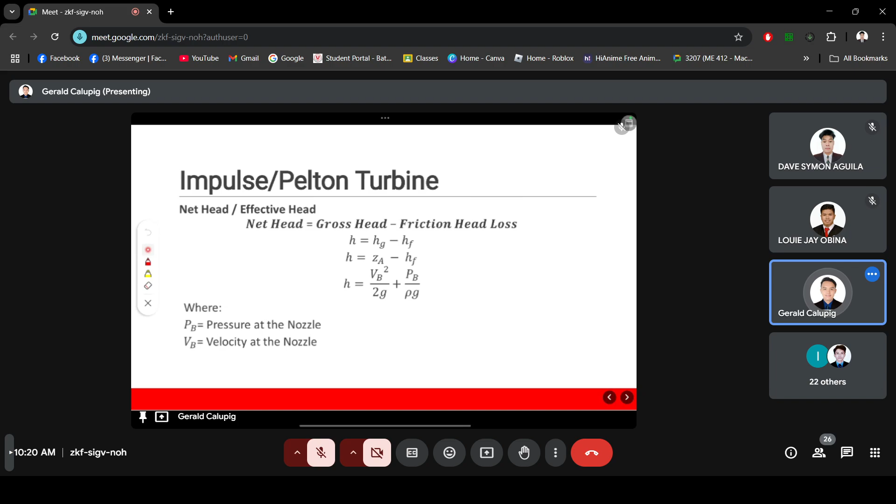Here, yung PB lagi natin is based on the Bernoulli equation. It is the pressure head and the velocity.

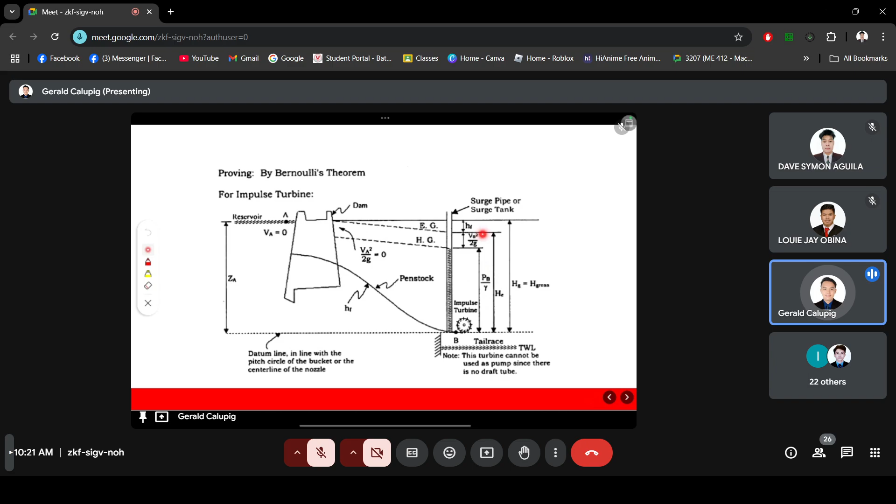So next we have here the frictional head loss. Frictional head loss HF is equal to FLV squared over 2 times G times the diameter. If it is Darcy, Darcy kapag nasa denominator ang 2.

HF, pag Morse equation naman, we can have HF is equal to 2 times FLV squared over GD, or acceleration due to gravity times the diameter. Pag Morse, ang 2 is nasa numerator. Pakitandaan ha, pag sinabing Darcy equation, ang 2 is nasa denominator. Kapag Morse naman, nasa numerator ang 2.

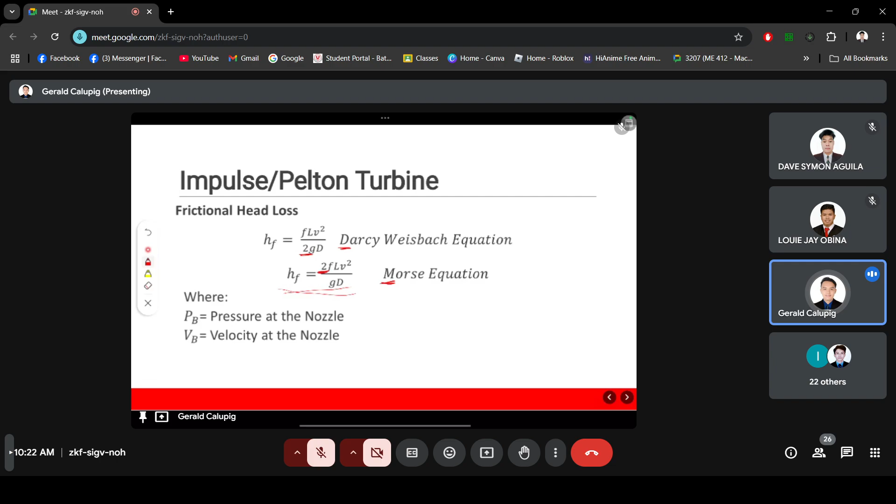Please take note of this formula. Any question po with this equation or formula? If none, we can proceed to the next.

But before that, please be reminded that the turbine casing here in the impulse turbine, ano yung ano natin before, hindi siya pressurized. So the runner operates in open air. Only the kinetic energy is being used, and this is ideal for high heads and low flow application. That is for the impulse turbine. Okay, before we go to the reaction turbine, this is just a review of our discussion last time.

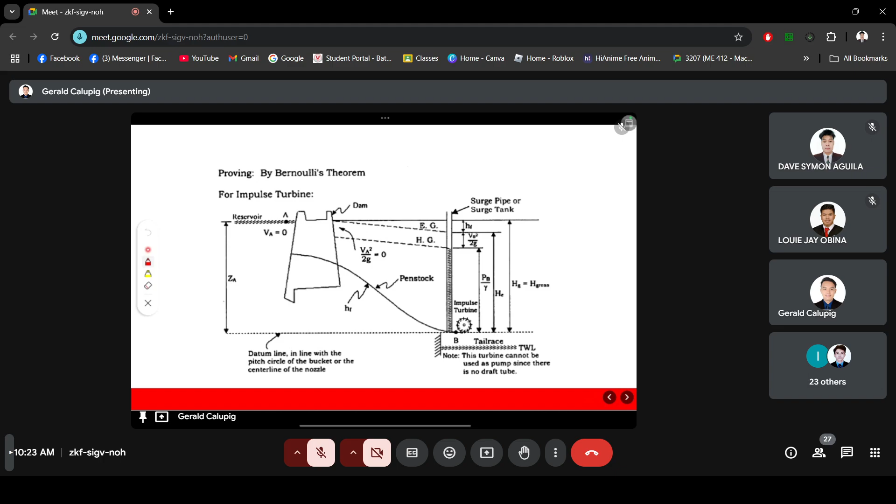Okay, next we will go to the reaction turbine. Reaction turbines, like Francis and Kaplan turbines, operate on a combination of pressure and kinetic energy. Unlike the impulse turbine, water flows around and through the runner. So the energy is extracted from both pressure changes and velocity. The turbine is fully submerged in water and operates under pressure.

So this is the diagram for a reaction turbine. In a reaction turbine, head isn't fully converted before the water enters the turbine. Instead, energy is extracted throughout the turbine as pressure decreases and the water flows over the blades.

So we have the components of the head. We have the pressure head, which is dependent on the pressure difference. Next is the velocity head, due to the motion of water, and the elevation head, due to the height of water. This is the same principle as with the impulse turbine, just that we have here ZB, which is from the turbine to the tail race.

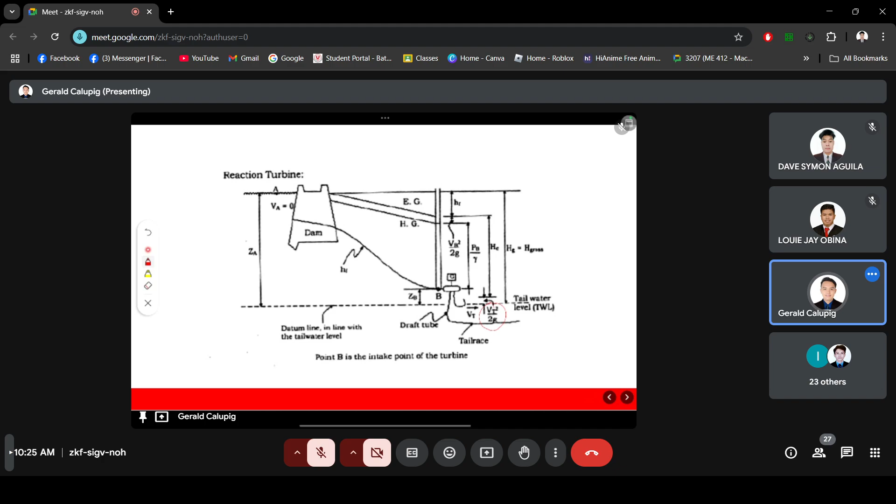So using Bernoulli's equation, we can have H is equal to ZB plus VB squared minus VT squared over 2G plus PB over the specific weight, which is density times the acceleration due to gravity, G.

Where PB is the pressure at the nozzle and VB is the velocity at the nozzle, and VT is the tail water velocity. But in terms of head, we can have H is equal to Hg minus Hf minus Vt squared over 2g. So we're subtracting the head in the tail water, or in the draft tube.

Any question for the reaction turbine? For the losses, same losses with the friction loss. For Darcy, we have FLV squared over 2dg or 2GD. And for Morse, we have 2FLV squared over GD. Same, don't get confused with the friction head loss. Remember, for Darcy, it is in the denominator. For Morse, the multiplier 2 is in the numerator, okay?

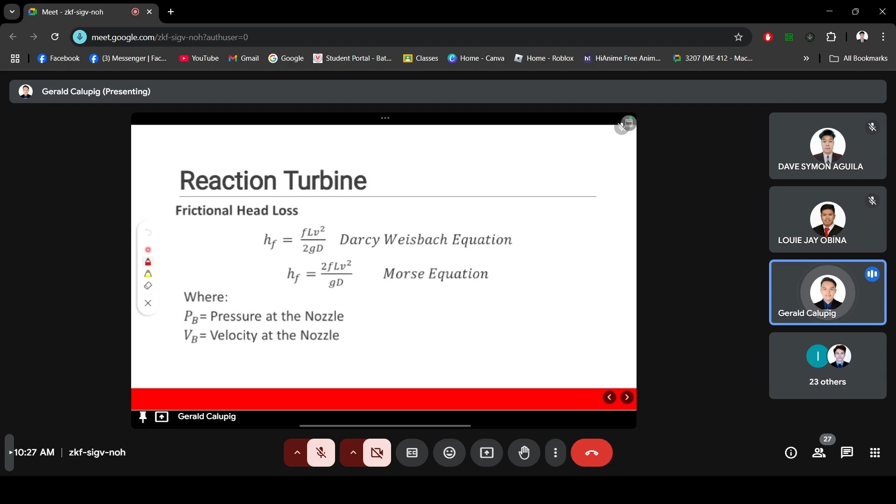Any question? None? So we can proceed to the next slide. We have the velocity of water jet at inlet. V is equal to CV times square root of 2GH. If we don't have the coefficient of velocity, we can neglect that. If it is given in the problem, we can include that. Remember, if there's no CV in the problem, exclude CV in the formula or treat it as one. If it is included or stated in the problem, please include CV, which is V equals CV times square root of 2GH, where H is the net head.

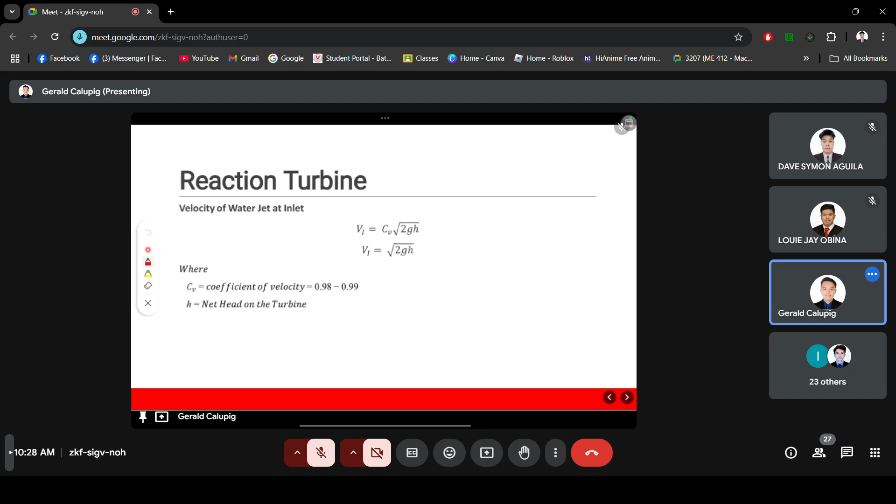Next, the penstock efficiency. We have penstock efficiency equal to H over Hg, where H is the net head of the turbine and Hg is the gross head. Same with the fluid or water power, or the hydraulic power, we have Fp equal to specific weight times Q times H, where Q is the volume flow rate. It is the same principle as with the pumps, fluid power equals specific weight times Q times H.

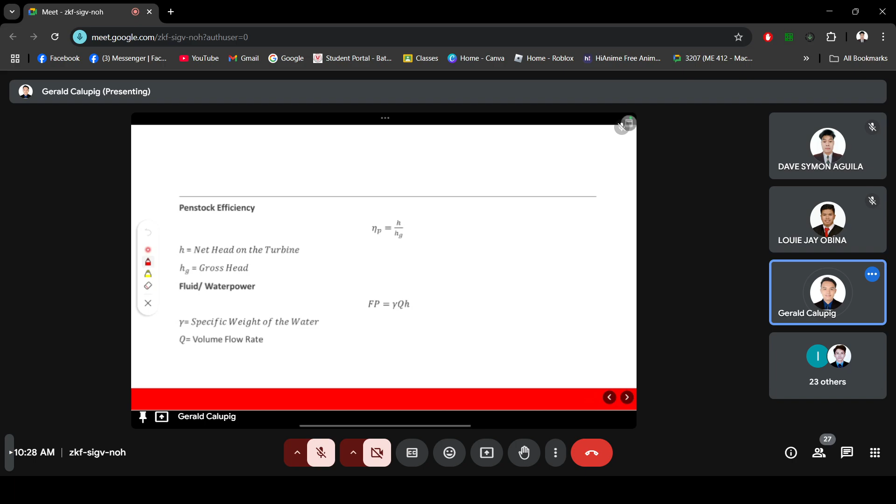We also have the peripheral coefficient, or speed ratio. Speed ratio is the ratio of peripheral velocity to the velocity of the jet, which equals pi dn over square root of 2gh. If we have a given CV, kindly include it. If not, don't include it.

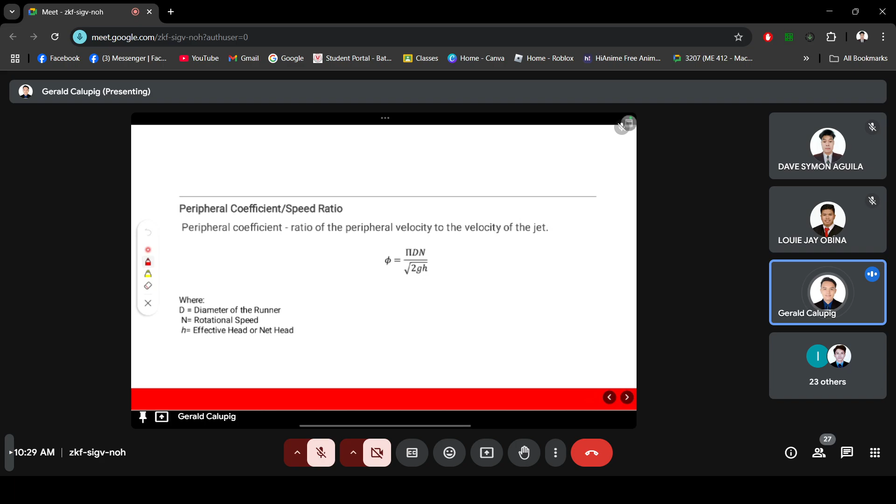So for the generator speed, we have generator speed N is equal to 120 times F over P, where F is frequency. Here in the Philippines, we use F is 60 hertz. And for P, that is the number of poles.

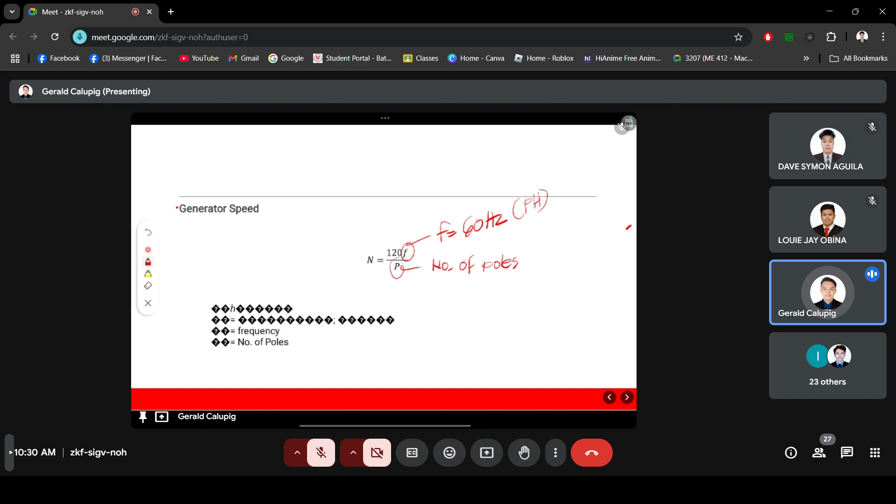Okay, any question for the formulas? Let's proceed to the next. We have the turbine efficiency. NT is equal to brake power over fluid power. For the output, or the turbine output, we have WT equal to specific weight times Q times H times NT, where H is the net head, Q is the volume flow rate, and NT is the turbine efficiency.

Next, generator efficiency. NG equals generator output over brake power. It's much better if you can plot this to our lecture from last week, that flow diagram of turbine operations. We had last week the flow from the reservoir up to the tail race, up to the generator, the last rectangle in the flow diagram. From that, make a formula for each gap. For example, you have the generator and the turbine, what's in between them? This is so you don't get confused during examination.

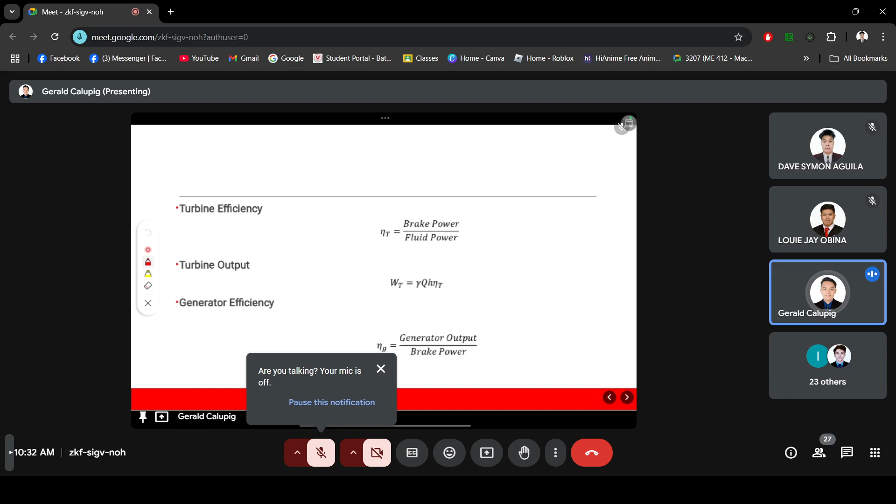Next is the specific speed. NS is equal to N times square root of power in terms of HP, over H raised to 5 over 4. This is for the English system. For the metric system, where power is in kilowatts, you can use the formula: specific speed is equal to 0.2623 times N times square root of power in kilowatts, over H raised to 5 over 4. Please take note of this formula.

Any questions before we proceed to the sample problems? Any questions? If none, we can proceed to the next.

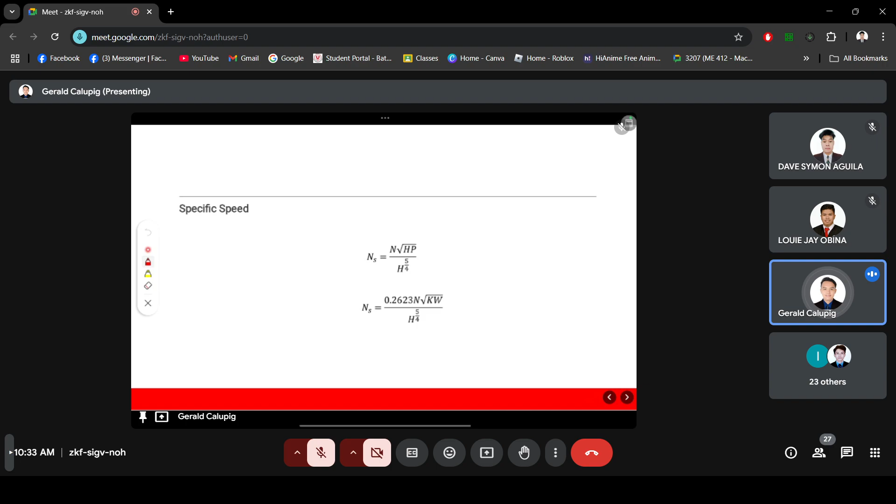So we have here the ranges for each turbine. In identifying the possible turbine, you are asked to find the NS first. Once you already have the NS, you can identify what turbine should be used. If your range is 16 to 30, you can have the Pelton wheel with one nozzle. If it is 30 to 70, it is a Pelton wheel with two or more nozzles. 70 to 400 is under the Francis turbine, which is divided into four ranges.

So we can have 70 to 120 for the slow speed runner, 120 to 200 for the normal speed runner, 200 to 350 for the high speed runner, and 350 to 400 for the special high speed runner. Next range is 400 to 800, that is for the propeller turbine with non-adjustable vanes. And if it is Kaplan turbine, you have a range of 800 to 1000. That's specific speed.

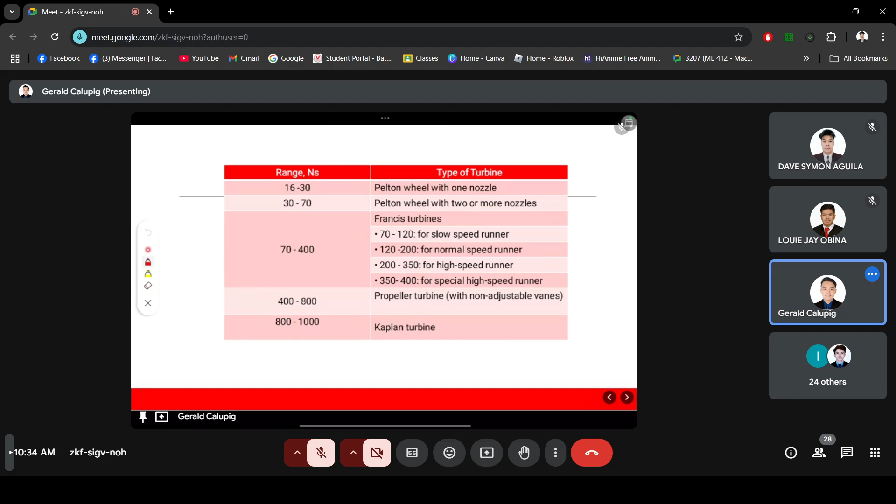Any questions with the ranges? Next, we have here the table or the graph in terms of head, power, and N over NS.

Any more questions? If none, we can proceed to the next sample problem.

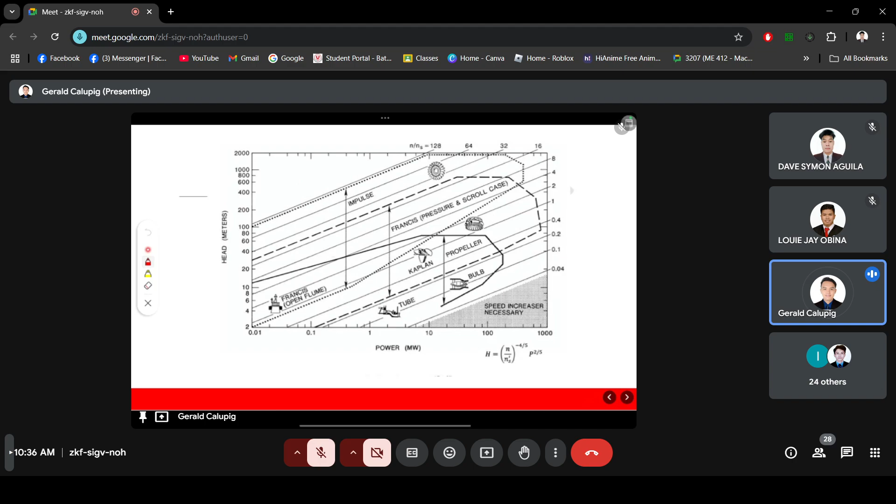So we have here sample problem number one under turbine. We have a Pelton turbine type with a 30-meter head below the head gate of the penstock. The head loss due to friction is 15%, and the coefficient of friction head loss from the Morse formula is 0.00093, and the penstock length is 80 meters. What is the penstock diameter, and determine the power input in kilowatts? You can solve this using our formula.

They will give you the answer first so you can check. I have here the answer: the diameter should be 1.6864 meters, and for the fluid power, you get 12.468 megawatts, using the formula of specific weight times Q times H. Just try to solve it using our formula so we can discuss it later.

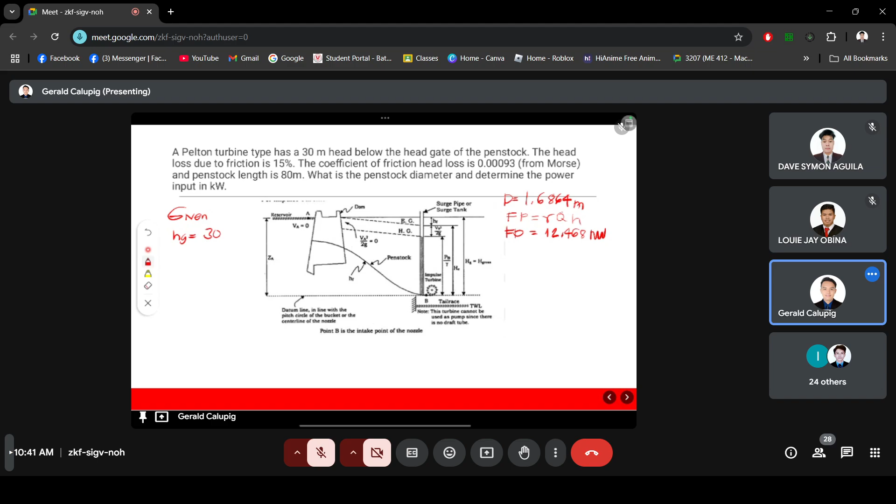So our given: the gross head HG is equal to 30 meters. And we have HF, which is 15%, that is 0.15 times 30 meters. So HF should be equal to 4.5 meters.

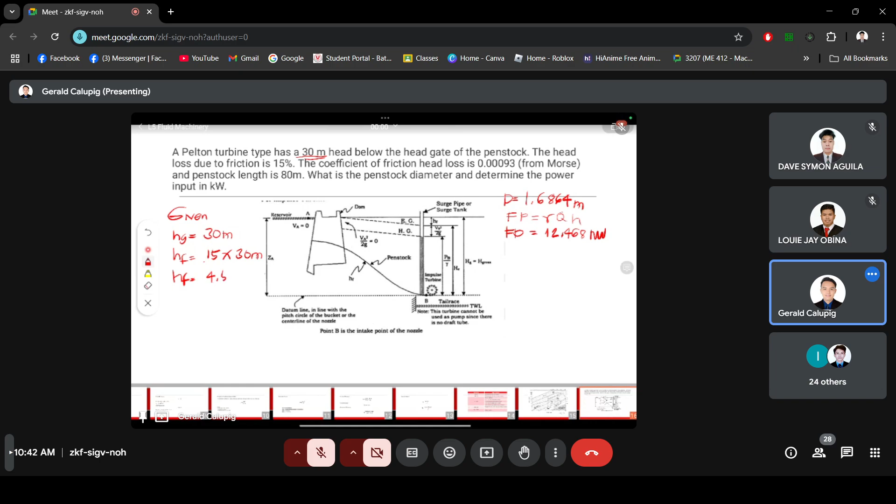Next, we have the coefficient of friction F equal to 0.00093, and the penstock length is 80 meters. We are asked to find the penstock diameter and the input power in kilowatts, which is the fluid power, FP. Let's proceed to the solution.

First, since we have a given, the net head is equal to HG minus HF. So H is equal to 30 meters minus 4.5, which gives your net head as 25.5 meters.

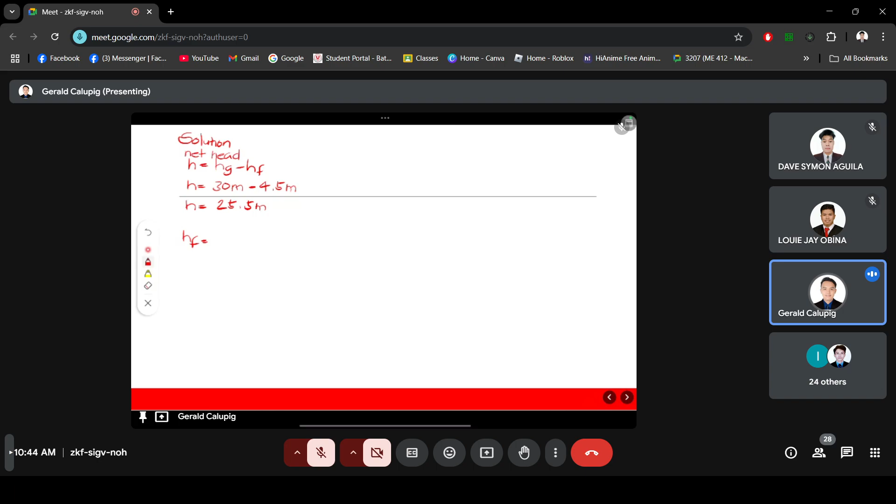So we can have here HF is equal to 2FLV squared over GD. Para makuha natin yung diameter, we already have the HF, the L, the F, but we don't have yet the V.

So for V, we can have the formula of velocity, which is 2 times G times H. Since we don't have the coefficient of velocity, let's neglect that. So we can have here 2 times 9.81 meter per second squared times, what is the value of our H? 25.5 meters, correct? So our V is equal to what?

Please try to compute po so we can write the data value. 22.3676. Okay, thank you. Meter per second.

Okay, since we already have the value of V, we can substitute that to the formula of HF. So we can have HF is equal to 2FLV squared over GD. That is 4.5 meters is equal to 2 times

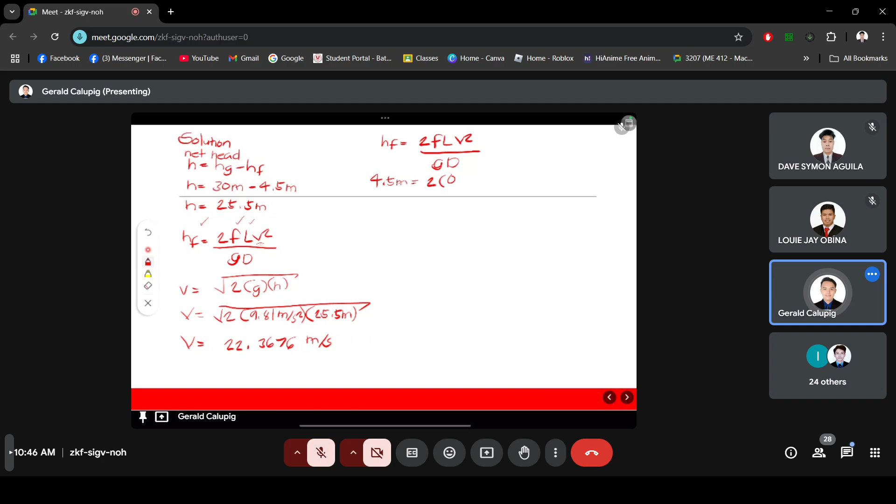0.0 value nun, tingnan natin ha, 0.00093 times L, which is 80 meters, times ang V natin is 22.3676 meter per second over 9.81 meter per second squared times D.

So our D will be what? Ano pong V natin? Nakuha is, based on our answer, we can have that 1.6864 meters. Correct?

Okay, next, since we already have the diameter, tapos na tayo dun sa isa, we can have the fluid power. Our fluid power or hydraulic power, we can have the formula of specific weight times Q times H.

Since we don't have yet the Q, we can solve that, no? Q is equal to cross-sectional area. The cross-sectional area is equal to pi over 4 times D squared times V. Okay? So our Q will be what?

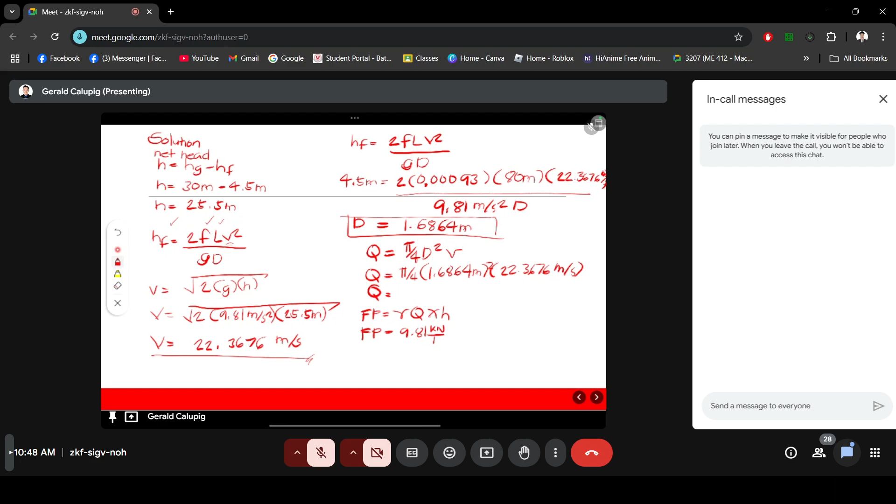So next, we can have our FP is equal to specific weight times Q times H. We can have FP is equal to 9.81 kilonewton per meter cube. Ano po yung Q natin? 49.9609 meter cube per second.

Times 49.9609 meter cube per second times H. Ang H natin is 25.5 meters. We can have our FP is equal to what?

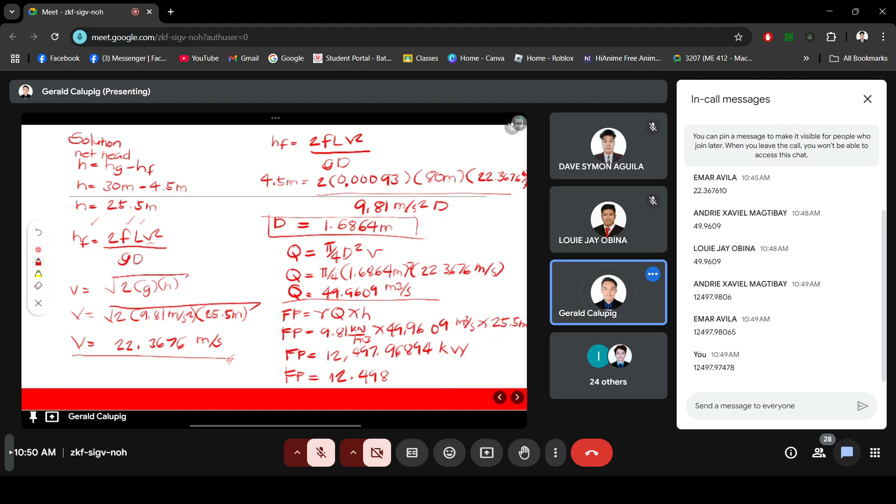49.9609 times 25.5 times 9.81. We can have 12,497.96894 kilowatts. Or we can have our FP, since we have a huge number, we can have that 12.498 megawatts.

So we can have our fluid power is equal to 12.498 megawatts. Any question po? Nakuha po ba ng lahat? Okay, thank you. So, yes po.

Sir, may question po ako dun sa velocity, pero okay lang naman po. Dun po kasi sa formula ng velocity, meron pong CV. Kailan po ginagamit yung may CV, sir?

If it is stated in the problem that we have the coefficient of velocity, we can include it. If it is not included in the problem, we can exclude it.

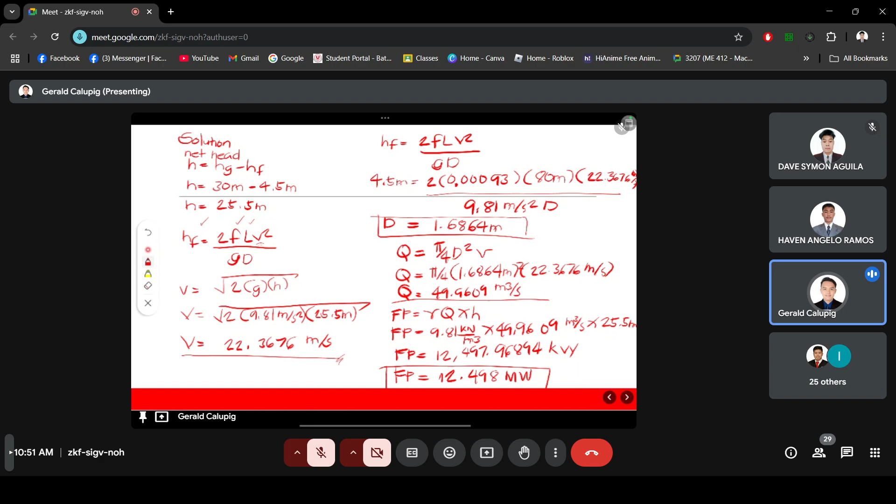Okay po, pero ang gagamitin po dun sir is yung 0.98? No. If it is included sa problem, ang CV, kalimitan ang value niya is 0.98 to 0.99. If hindi siya kasama sa problem, if it is not included, wag niyo nang gamitin yung CV.

Okay? Yan lang naman, thank you. Any clarification pa? Remember, no, kapag walang CV sa problem, wag niyo na i-include sa formula. Okay? If meron, include niyo. Okay?

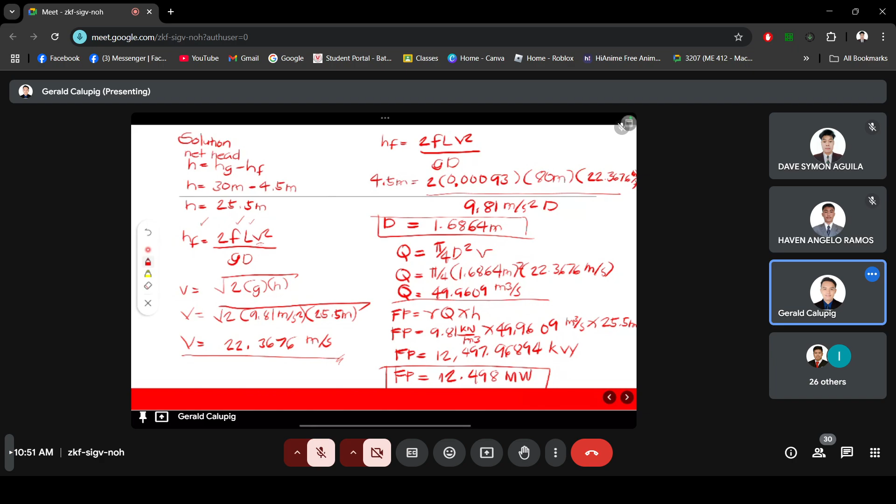Next problem we have here. Problem number two. In a Francis turbine, the pressure gauge leading to the turbine casing reads 380 kilopascal, and the center of the spiral casing is 3 meters above the tail race. If the velocity, yes po, question?

May question po ba? Yung efficiency, may question ba efficiency? Efficiency ng... Last problem. The number one, wala naman tayong tanong na efficiency. Wala tayong tanong na efficiency. Coefficient yun ng friction.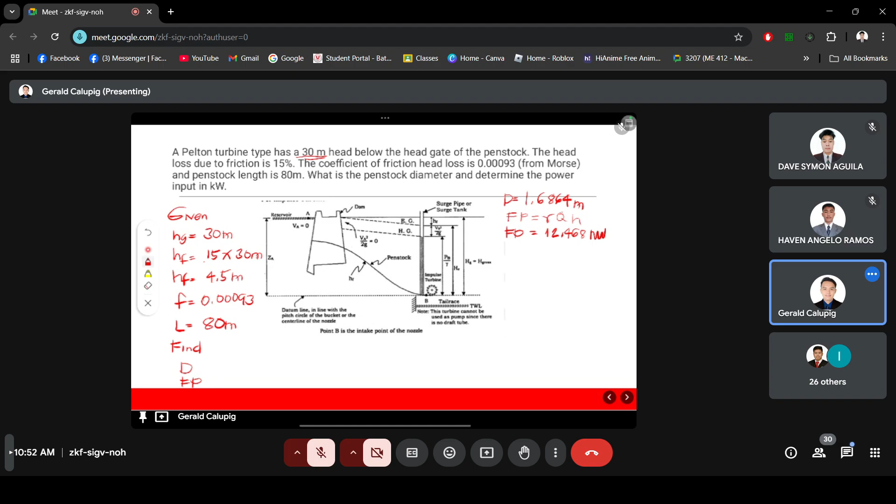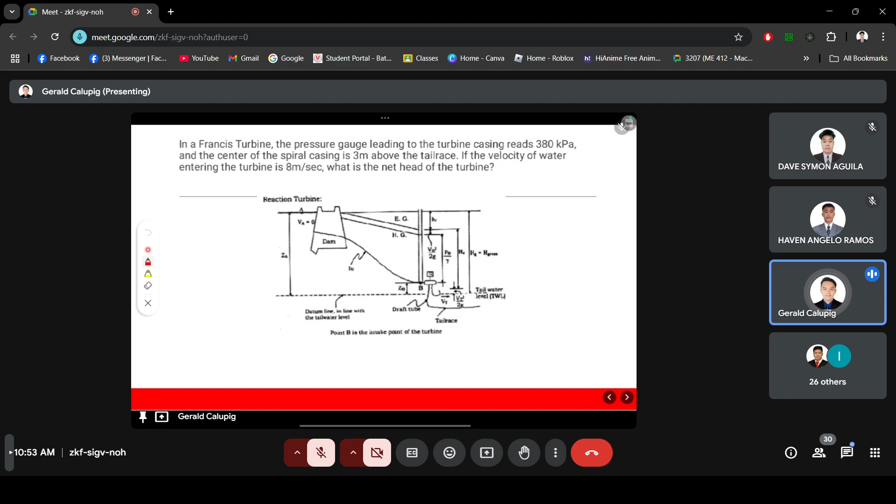Okay, going back, okay sige, sige. So going back, in a Francis turbine, the pressure gauge leading to the turbine casing reads 380 kilopascal, and the center of the spiral casing is 3 meters above the tail race. If the velocity of water entering the turbine is 8 meter per second, what is the net head of the turbine? So here you will going to use the Bernoulli's equation, which is the net head is equal to what?

Pressure head plus velocity head plus the elevation head. Please try to solve po and you can get the value of head is equal to 44.9978 meters. Okay, please do not try to solve but i-substitute nyo na. Direct sub yung problem. Okay? Please try po.

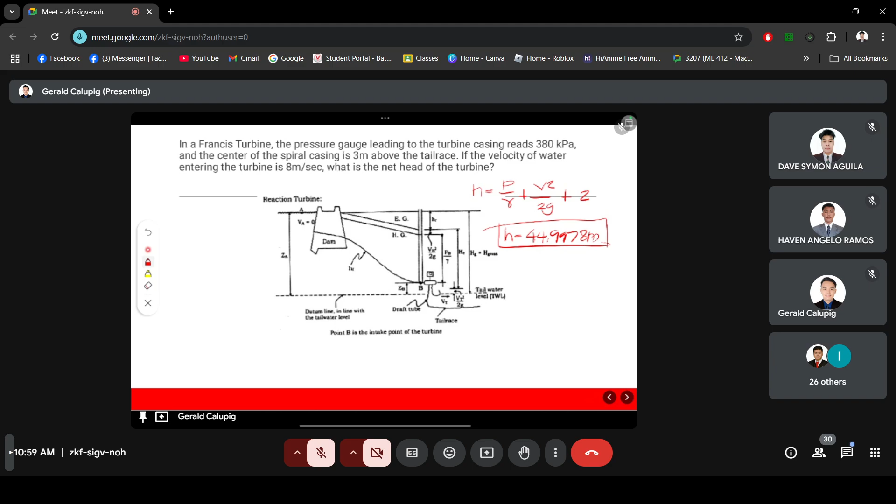Okay na po sir. Okay na. Okay po. Sige. So, ayun po sir, pasensya na po, medyo po magulo po yung sulat ko. Okay. Sige, continue. Bali, sinulat ko po yung given po natin na pressure din po yung ating CB po or yung ano. Then, given po ang ating VT which is, yun nga po, then direct substitution na lang po na sa formula na PB over rho or the specific po, tapos specific density po, tsaka yung gravity, then VB squared minus VT squared over 2G, then plus ZB. Then direct substitution na lang po.

Since meron pong given na yun nga pong pressure po na naka KPA, para po makancel po natin yun at makuha po natin yung final answer po, ginamit ko po siya, ginawa ko po siyang Newton meter squared, which is kung ano po natin yung mga units po niya, pwede pong gamitin na kilogram meter over second squared. Then para po makakancel na po natin yung mga units po para makuha po natin. Hindi ko lang po nasulat yung meter, pero final may meter po yun.

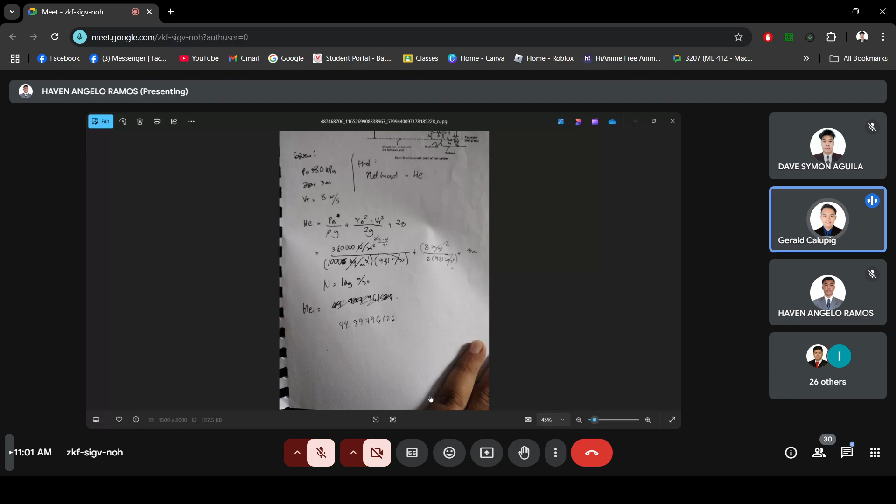Okay, thank you. Pero dun sa ayun sa pressure, you can use naman yung 380 kilonewton per meter squared. Since ang ating specific weight is we can have 9.8 kilonewton per meter cube, para hindi na tayo pwede naman yung sa unit analysis, pero if nagmamadali kayo, or you can have the understanding with the relationship with the pressure, since pressure is force over area, okay naman din yun. Okay, thank you, thank you.

So, any question po before we proceed to the next problem? May question po ba? Okay. Okay, I think we can proceed to the next problem. Thank you, no, thank you.

So we have here a turbine is to operate at 400 RPM under a net head of 1,320 feet. If a single 6 inches diameter water jet is used, find the specific speed of the machine, assuming CV is equal to 0.98 and the specific speed or the speed ratio is equal to 0.45 and NT is 0.85. Find also the required pitch diameter of the wheel. Okay, please try to solve this one.

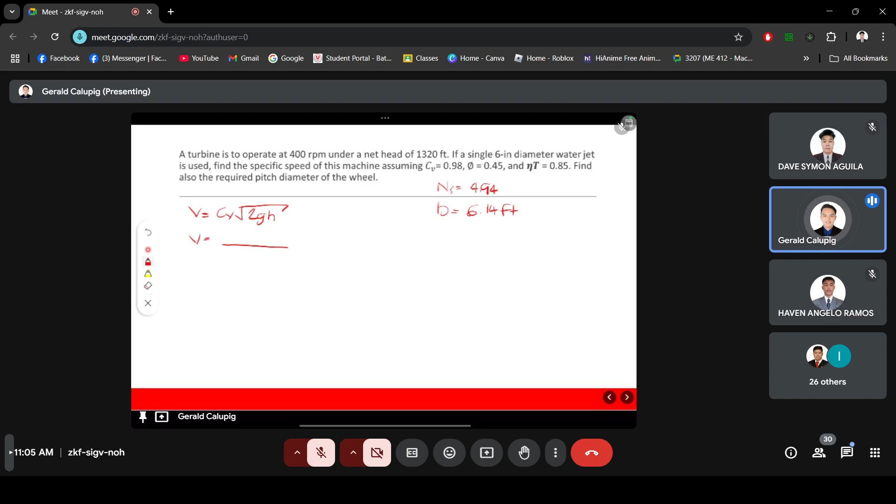So you can use a formula for the, sige nga, isulat na natin. So in solving the power, you can solve first the velocity, right? So you can have the velocity is equal to, since we have here the CV, that's include CV. CV is equal to, or V is equal to square root of 2GH. Okay. So you can have your velocity. Then in Q, no, so we have the formula for Q, which is the cross-sectional area. If it is circle, we can have pi over 4 d squared times v. You can have the value ng q.

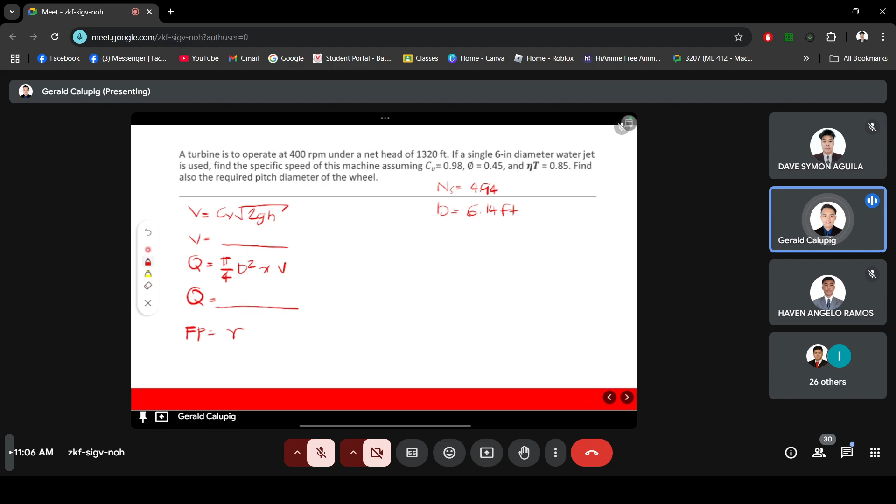Okay. Since you already have the value ng q, you can have the fluid power. Or the hydraulic power, which is in terms of, or the formula for fluid power is specific weight times q times h. Okay. So you can have your fluid power is equal to what? Okay. Then, since you already have the fluid power, you can have the WT using our NT times the fluid power.

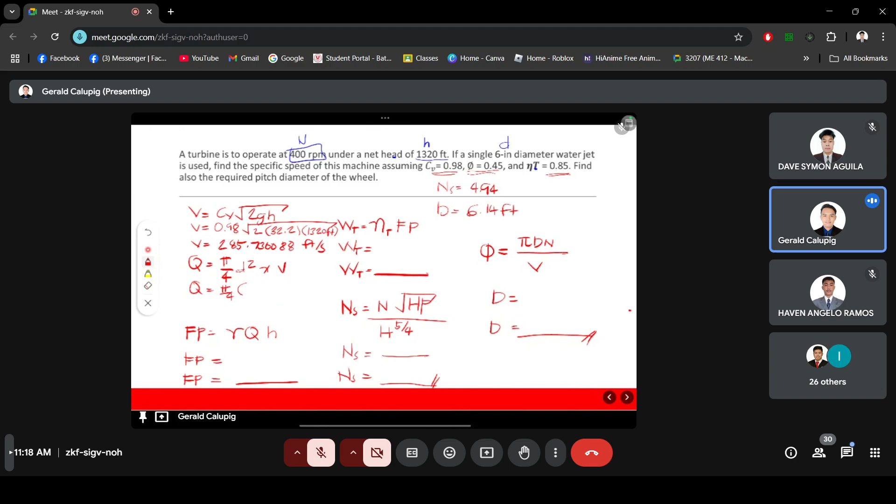So next we have the Q. Let's erase this. Q is equal to Pi over 4 times D, which is 6 inches, so we can have 0.5 feet, times V, which is this one. So Q is equal to pi over 4 times 0.5 squared times V, giving us around 56.1.

That should be 56.1097159 per second. Okay, our FP is equal to what? Our fluid power.

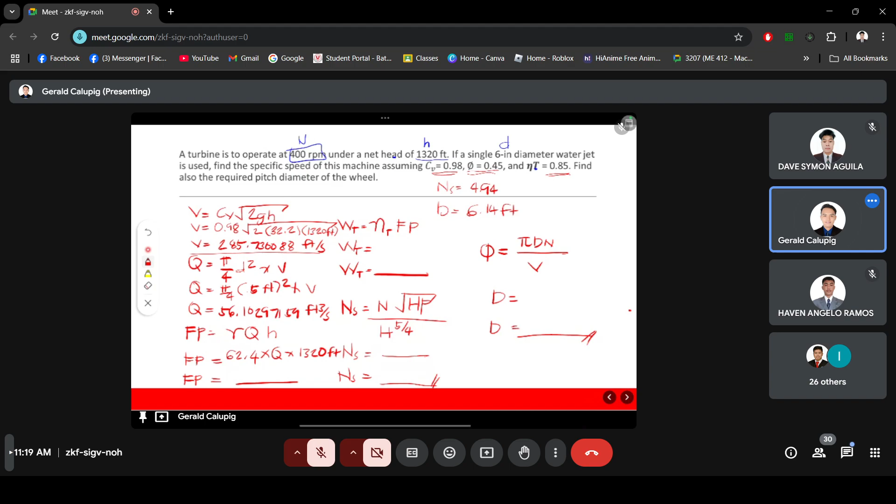62.4 times our Q times our H, which is 1,320 feet. What answer did you get? Let's multiply: 1,320 times 62.4. We can have 8,401.98.

So we can have 8,401.981025 HP. So what is our turbine power? Please check. Is it really just 62.4, not multiplied by 32.2? No, that's direct, 62.4 for the unit.

Okay, the ηT is 0.85 times the fluid power, which is 8401.98 HP. Divide this by 550 to get the HP. This might be wrong. Okay, what is our WT? 0.85 times that is 7141.683871 HP. Did everyone get it?